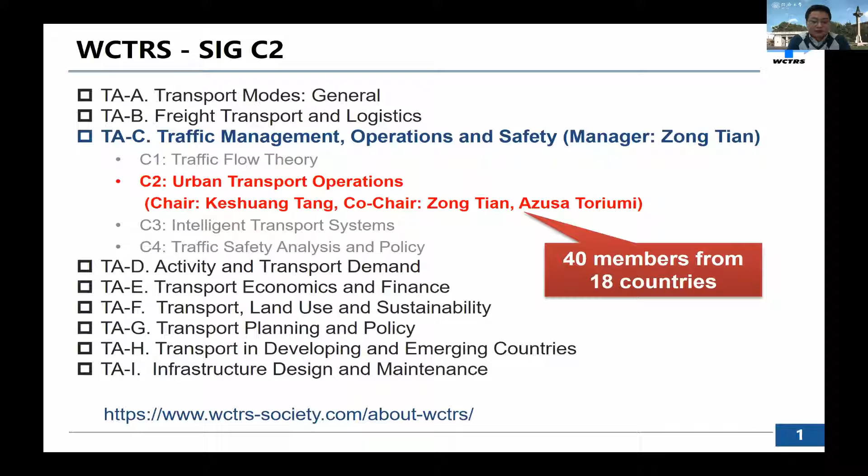Since some participants may not be aware of SIG-C2, I want to briefly introduce our SIG. SIG-C2 is one of the special interest groups under topic area C of WCTRS. The focus of this SIG is urban transport operations. Currently, I'm chairing this SIG along with Professor Zong Tian from University of Nevada at Reno, who is also the manager of topic area C, and Dr. Azusa Toriumi from University of Tokyo, who will be moderating today's workshop later. So far, SIG-C2 has 40 members from 18 countries. For more details about WCTRS and our SIG, you are welcome to visit the website below.

Before the start of the workshop, I would like to briefly explain the background and objective of this workshop. In 2017, WCTRS and Elsevier decided to publish a co-branded book series. In this context, SIG-C2 planned 3 books on global practices on road traffic signal control. So far, the first book has been published already and is now online, available to purchase at the Elsevier website.

The second book will focus on arterial coordination and actuated control. An author team led by Professor Zong Tian is working on it, and they just submitted the book proposal to Elsevier. The third book will be about actuated and adaptive control in the context of emerging technologies. This book is still in the planning stage, and you are welcome to contact me if you are willing to contribute to it.

To better prepare for the second book on arterial coordination signal control, we planned this online workshop series. The primary objective is to invite different professionals from academia and industry to share state-of-the-art practices in their countries, so that we can discuss the differences among these selected countries. Then we can have a global picture about arterial coordination signal control. This is the general purpose of this workshop series.

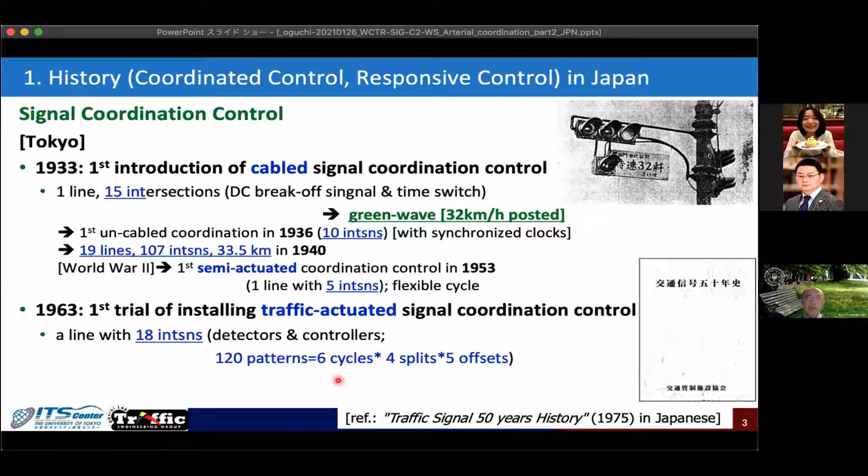This was ruled by the main computer. The idea was giving a set of parameters for signal cycles, splits, and offsets, combining them into 120 patterns, and trying to select the best patterns.

Then, after three years of experience, in 1966 came the first trial of area-wide signal coordination, at the Ginza area - the commercial heart of Tokyo - with 35 intersections applied for this kind of trial, not just one arterial but a network-wide application.

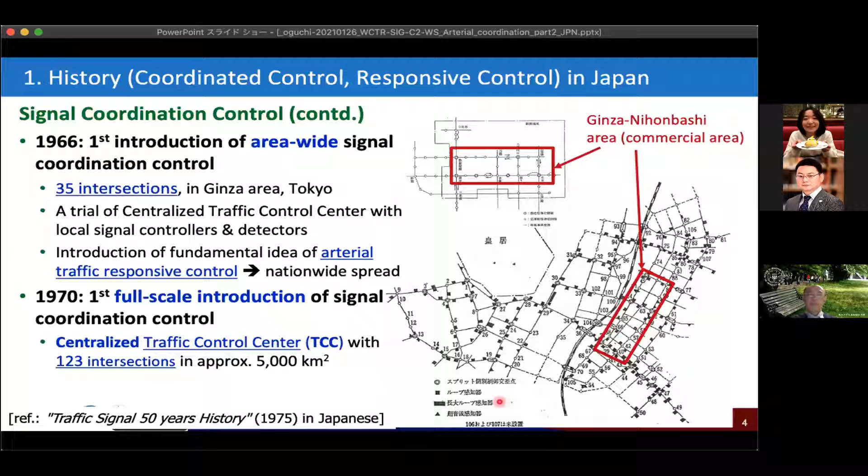This introduced a very fundamental idea to the system. Rather full-scale application started in 1970. This is the original form of the Japanese centralized traffic control system, where the Ginza area was included in a widened area application. This is the start of Japanese history in this field, up to today.

This explains the technical manual background for such practices. The first manual on signal control was published in 1969, and a design manual for intersection geometric design also started, published in parallel under different timelines.

In 1983, the first version of the so-called traffic signal control manual was published, already including a rather detailed description related to coordination. In 1994, we had a revised version, including an established idea of pattern selection for coordination.

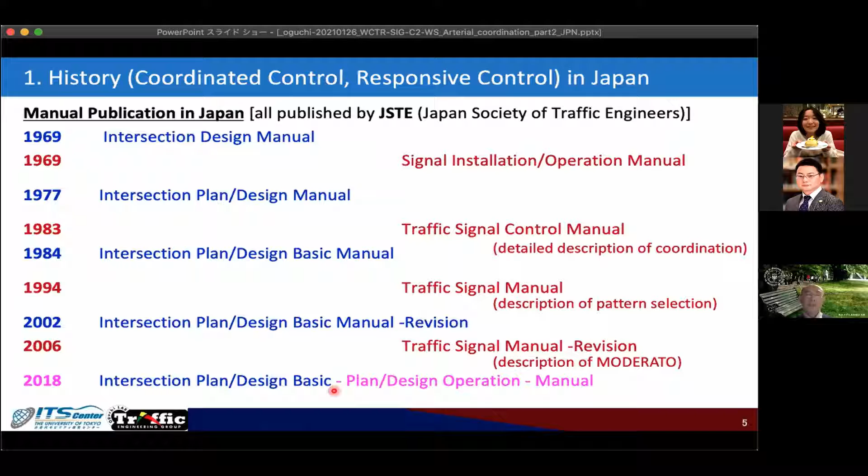In 2006, a revised version included not just parameter selection but also real-time calculation methodology. Very recently, we had a unified, comprehensive basic manual on intersection plan design and operations.

I also want to introduce the Japanese situation at this moment. This number was also introduced in the first published book by WCTRS, as Keshuang mentioned. We had centralized traffic control centers - basically every prefecture in Japan, of which we have 47, had a head center, with some control centers or subsets of centers in large cities.

The total number comes to 168. As I mentioned, the National Police Agency has responsibility for this, and the main machines and systems for any of these centers are provided by five Japanese industries.

Now about the number of signals applying such coordination: more than 70,000 signal intersections are connected to such traffic control centers and have a coordination function. On the other hand, around 26,000 have coordination functions but are unconnected, therefore working independently with their own set coordinations. Also 900 push buttons are connected to the coordinated system.

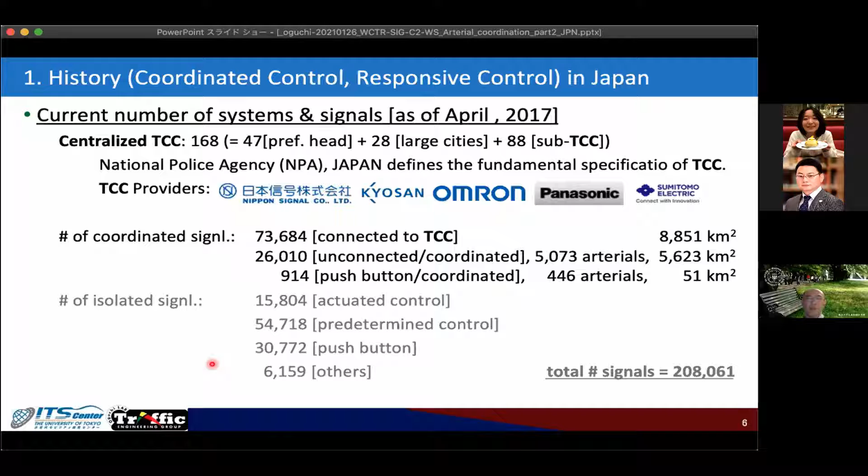On the other hand, we have a rather large number of isolated signals. One of our major topics is trying to connect those isolated signals using 5G connection technology.

For coordination, we had a very general simplified idea using a centralized control system. To consider the area-wide road network, we separate it into several subnetworks, and sometimes a group of subnetworks shares the same cycle length, so we try to connect the elements of the subnetwork and form a group of subnetworks.

This may not be such a big subnet, but looking at this area, this is a rather large subnetwork having a common cycle length of 110. So forming a group of subnets with a common cycle length is one idea, and then we determine the signal coordination for those intersections.

When you look at intersections having one link connected to a different subnet, we don't consider anything for the coordination between those two signals - that's the practice in Japan.

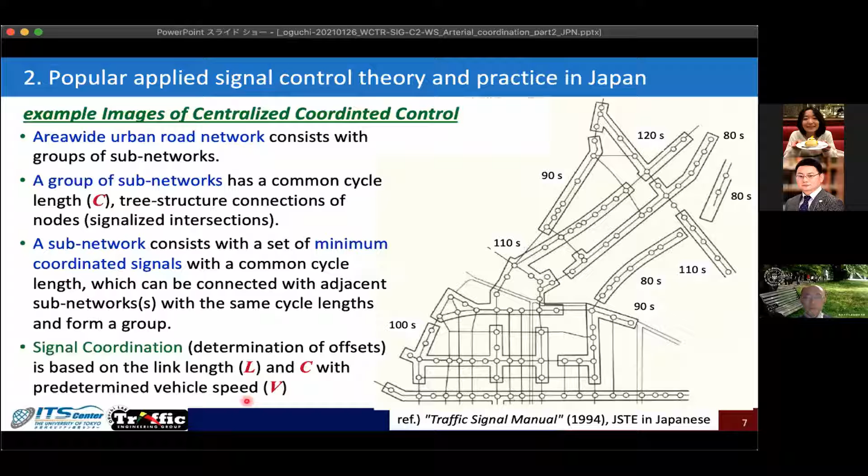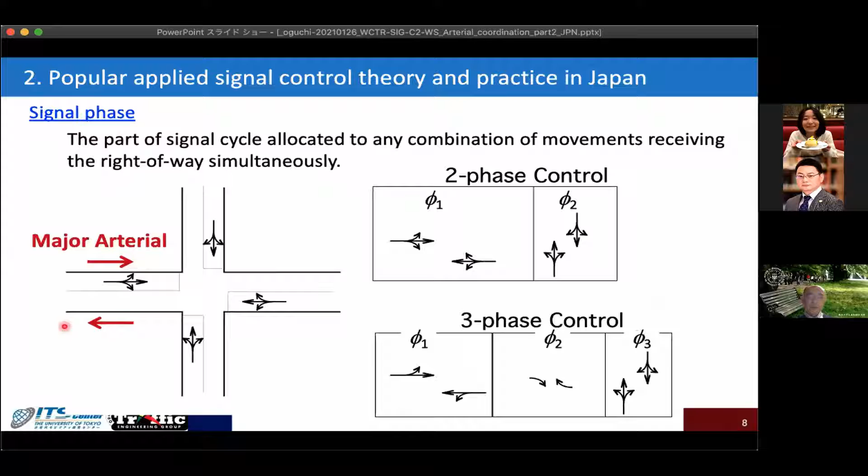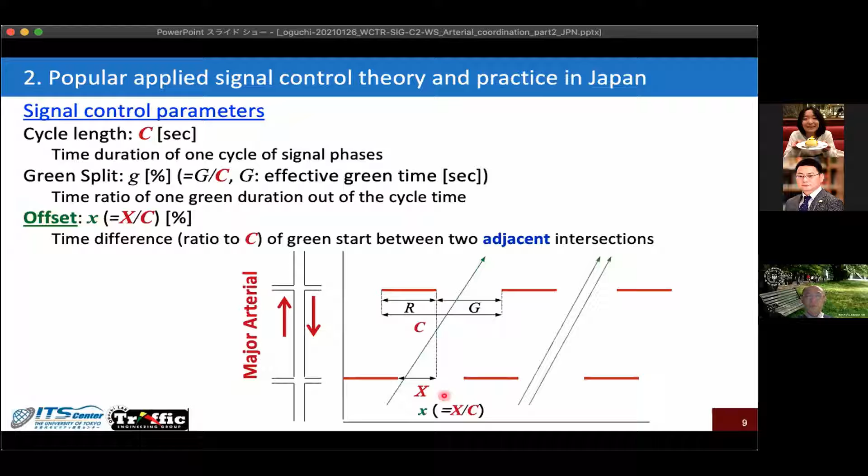Our Japanese application is very simple in considering coordination: we consider one arterial having a simultaneous start of green time for both directions, even with different phasing systems, focusing on the one arterial and trying to set the cycle length with an appropriate green split. From a coordination point of view, we try to set offset values, which could be expressed as a percentage of the cycle length in general.

For determination of the cycle length in Japan, one typical feature of the Japanese signal control system is trying to adjust cycle length very frequently, with 1 second resolution, as I showed, 101 second cycle length or something like that. From the coordination point of view, the cycle length is determined at the critical intersection, meaning the very busy intersection which should accommodate traffic demand at the highest capacity level. With such high demand, we should provide larger cycle lengths, and other intersections in the same subnet group should apply the same cycle length as a common cycle.

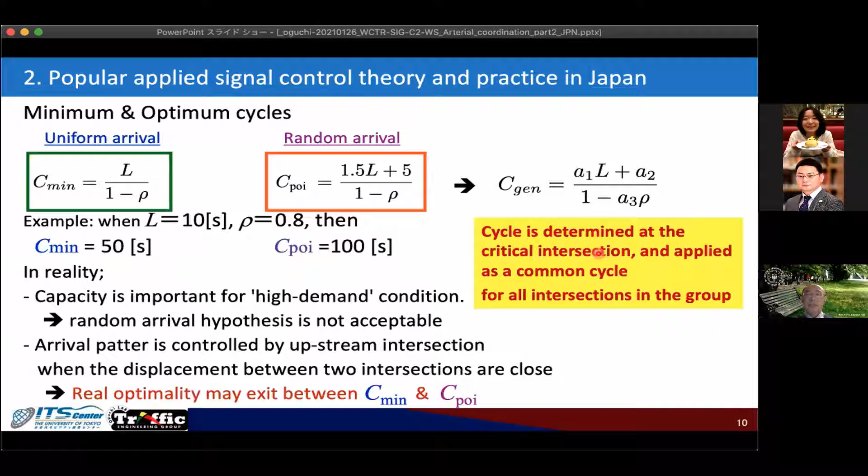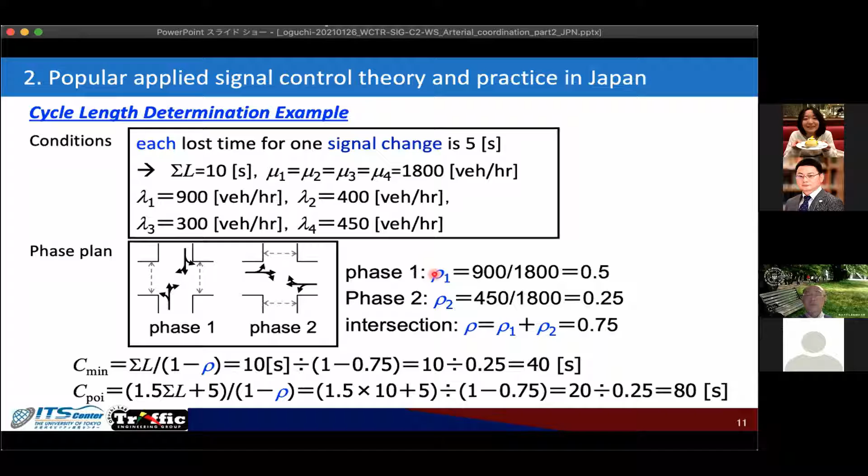This is just brought from my lecture note. Basically our Japanese practice is based on the concept of the flow ratio, demand flow rate to the saturation flow rate, so-called flow ratio, and applying that value to select the green split. This is the basic idea of setting the green split, and even for coordinated signals we apply the same idea.

This slide explains the classification of different aspects. First, the classification aspect is spatial: isolated, arterial, or network. For arterial or network coordination, determining the offset value is one important topic. On the other hand, for control classification, there is pre-timed control or responsive control - those are the two major differences.

As I mentioned, the intersection which is connected to the traffic control center applies a kind of responsive control. We have 168 traffic control centers, but the majority is still kind of simplified macroscopic traffic responsive control, meaning predetermined patterns of parameters are selected with some detector information, with rather fewer applications of real-time calculation of parameters.

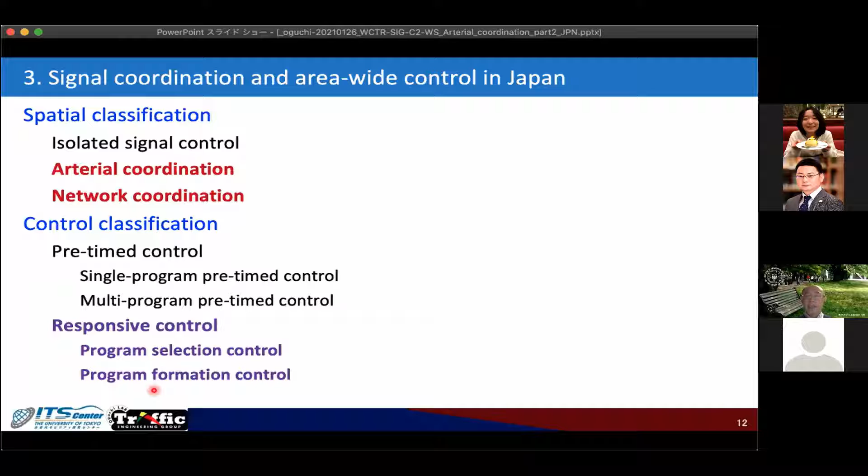Multi-program pretimed means for different days of the week or special conditions we have predetermined cycle lengths, green splits, and offset values. Such predetermined coordination control is applied at around 26,000 intersections, plus less than 1,000 push-button pedestrian crossings.

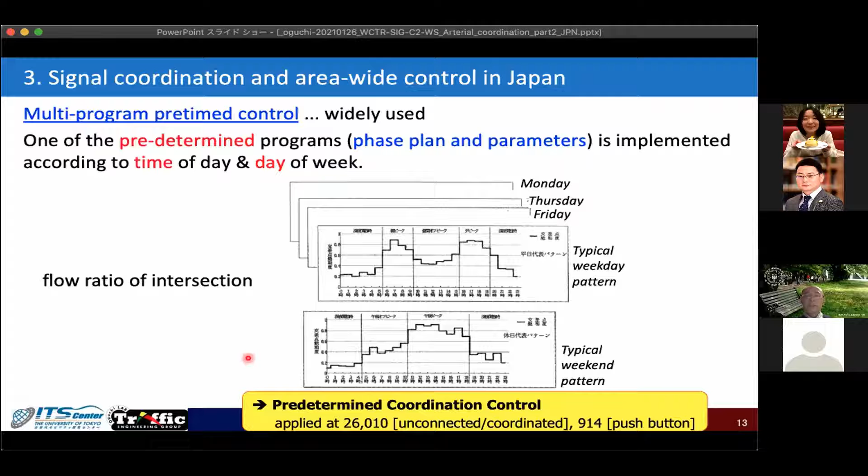For responsive control, the control parameters - cycle length, green split, and offsets - are selected or calculated in real-time using detector information. Responsive control is rather popular for microscopic response, meaning each intersection has its own responsive control function, for example detecting right turn vehicles and then extending the right turn phase or giving right of way to right turners.

On the other hand, from the coordination point of view, some macroscopic responsive control ideas are also applied in Japan - selection or generation of cycle, split, and offsets. Also for oversaturation situations, we have algorithms to select or generate those parameters.

To tell the history of Japan, the reason why we started introducing the traffic control center in the heart of Tokyo, Ginza, was to try to alleviate traffic congestion. The development of the control system in Japan was basically pushed by such serious congestion issues. At this moment, more than 70,000 intersections are controlled with this macroscopic responsive control scheme.

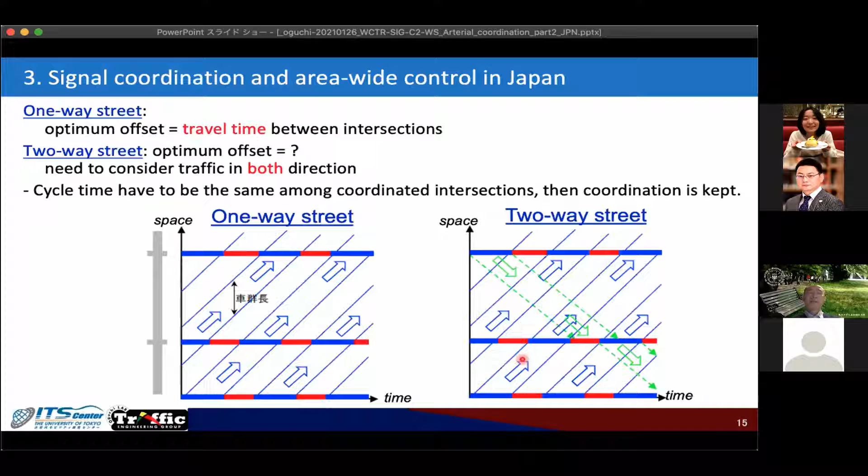The simple idea is considering that the return travel time should be a multiple of the cycle time. So set some cycle time, then the best coordination distance is determined by this, with a given travel speed, since travel time is length divided by speed. In our practice, we always consider the special cases of very well coordinated lengths or worst coordination conditions, where changing offset values achieves no delay reduction or no stopping conditions.

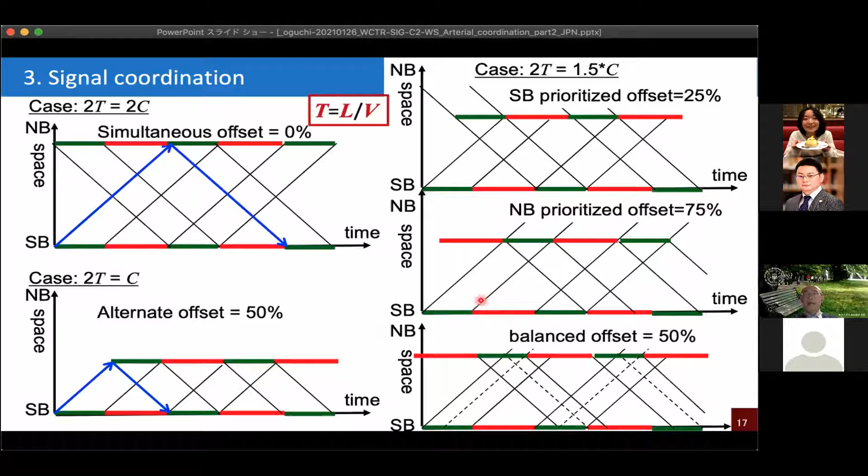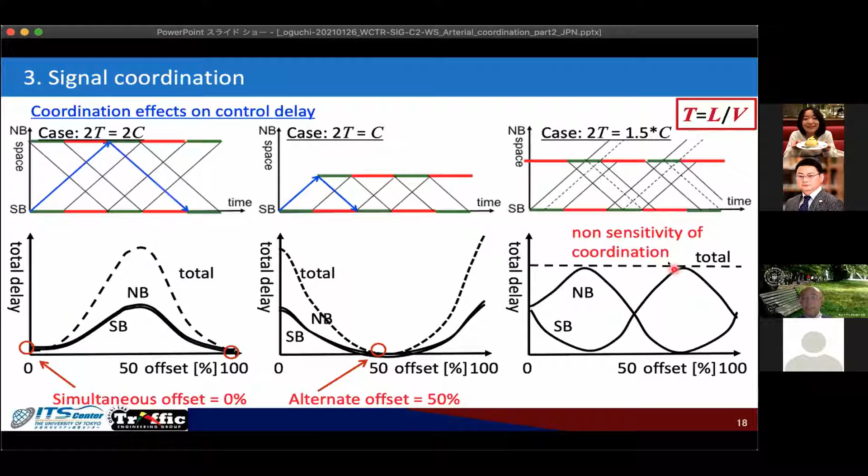To discuss the control delay, for the best conditions we can achieve no-stop delay for both directions, northbound and southbound. On the other hand, for some intermediate situation of the length, these situations have no effect on the total delay or average delay for both directions.

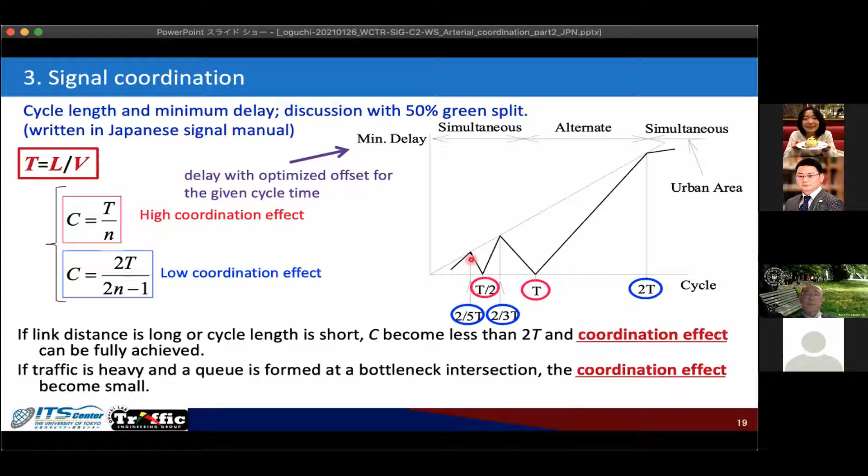And also, we had knowledge about the cycle length optimization conditions and cycle length settings for coordinated signals. Basically, if the cycle length becomes longer, the minimum achievable delay, which means well-coordinated offset values, we should still accept some level of delay, then it will monotonously increase.

This achievement was done by Professor Koshi. The publication was in 1989 in English, but he already proposed this concept in 1975 in Japanese. The Japanese manual applied his concept, so Japanese practice also follows this kind of idea.

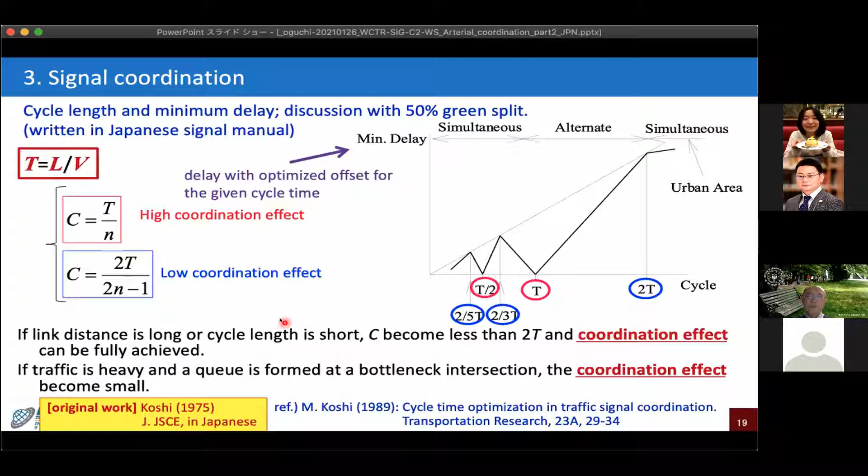This also shows the sensitivity of the coordination settings. At the best situations of this link length, we can achieve the highest coordination effect, which means when you set the most appropriate offset value, you can achieve the minimized delay. On the other hand, at this link length situation, maybe you can have any arbitrary offset values to achieve the same delay levels.

But this knowledge is very limited because it's only introduced for 50% green split for two intersections connected to one link. So this is a very ideal situation consideration only - only one isolated link with two intersections connected. Then we can apply this kind of idea. But in reality, maybe those two green splits should not be the same.

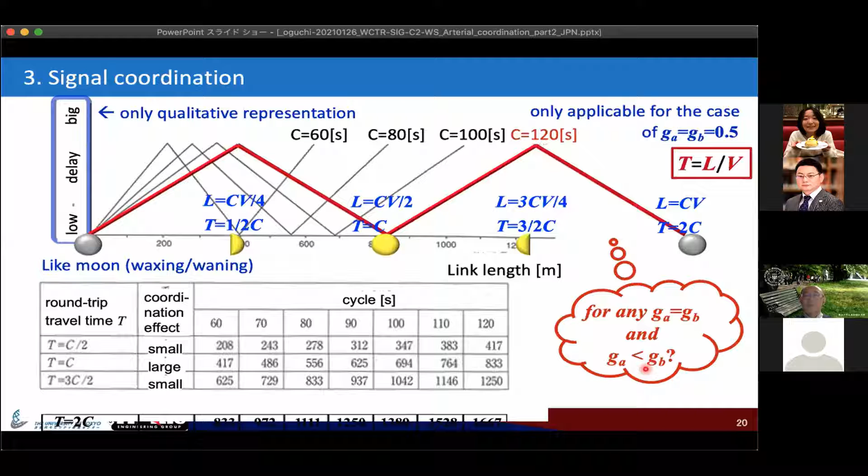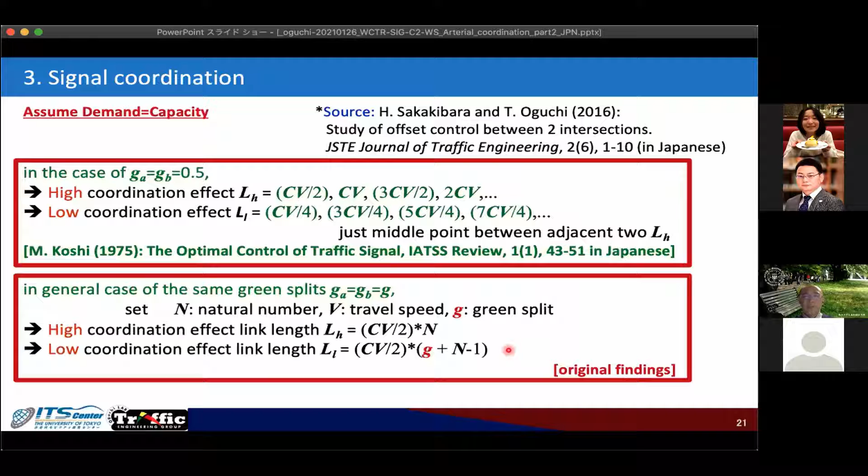So what will happen? Several years ago, this was a joint study, and we analyzed the characteristics of signal coordinations. But I will skip this topic, and also the generalized achievement we got very recently.

This is also something interesting - with some range of the cycle lengths, we can achieve the minimum or zero delays, and this is the characteristic when we have different green split values.

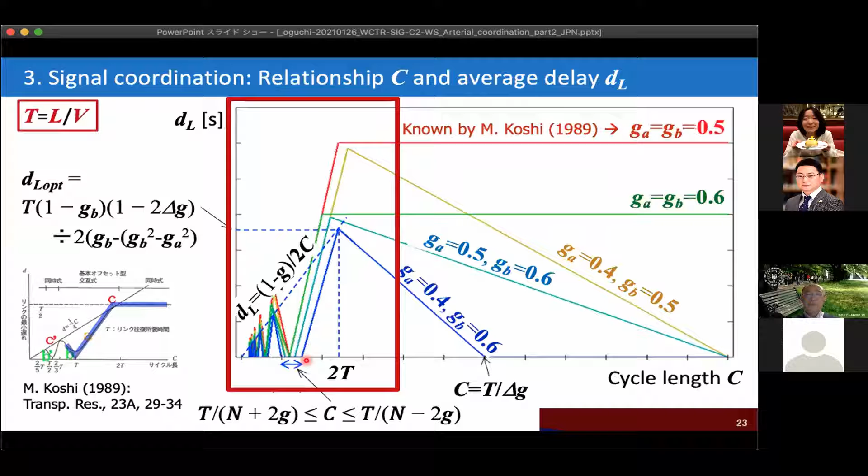Okay, then come back to the practice in Japan. I have only six minutes right now. So what is the offset pattern selection method applied for the Japanese traffic control center?

This is an example of selecting tables. With detector information - one direction inbound flow ratio and the outbound flow ratio - applying those values, if the value is located here, some pattern of the so-called equity 2 should be applied. But if there's a rather low outbound flow ratio while the inbound flow demand level is high, then semi-prioritize to the inbound, or rather priority to inbound. This kind of idea is introduced, then the offset values are put in place.

In addition, these offset selections are done, for example, every 15 minutes or every 5 minutes. And if the offset values change from the last 15 minutes to the next 15 minutes, then we should change the offset value.

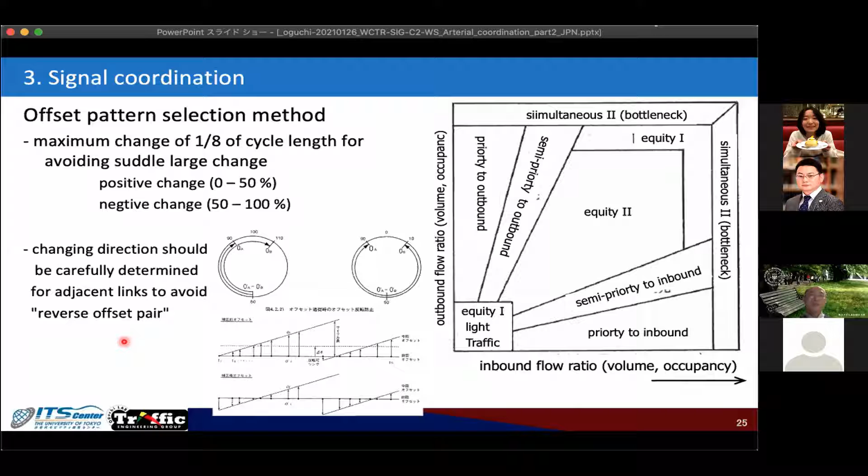We should also be careful that the changing direction - the offset value increase or decrease - should be carefully selected, because two adjacent intersections having different directions of movement can come to a reverse offset condition, which results in both sides facing a red signal and rather serious long queue lengths.

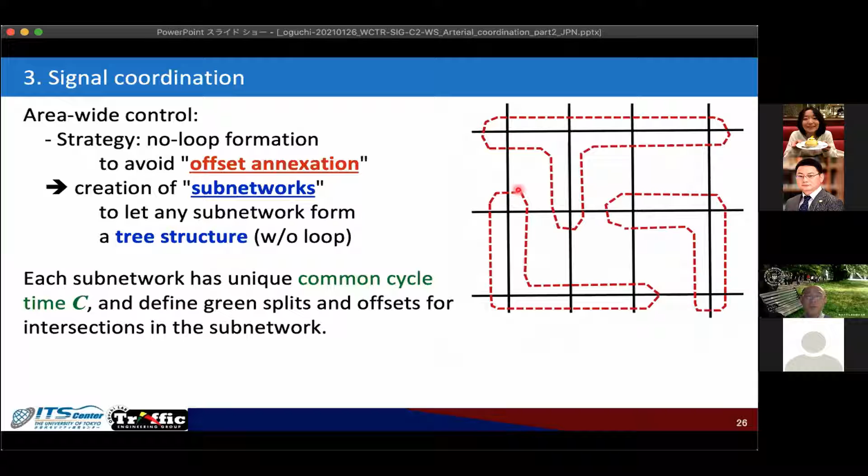As I mentioned, the forming of subnet systems is based on a tree shape structure, not having a closed loop. Having a closed loop means we cannot have appropriate parameters for all the links. Sometimes we should also reform such subnets, so the changing shape of those subnets is also considered every 15 minutes or so.

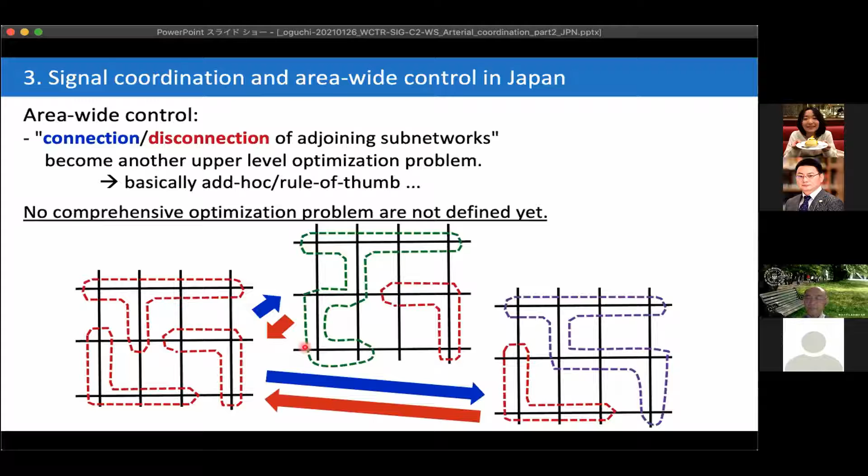The time is very limited, so I'll just explain several application cases that have been published. The first one is from 2013, when the Tokyo Metropolitan Police Department experienced this introduction.

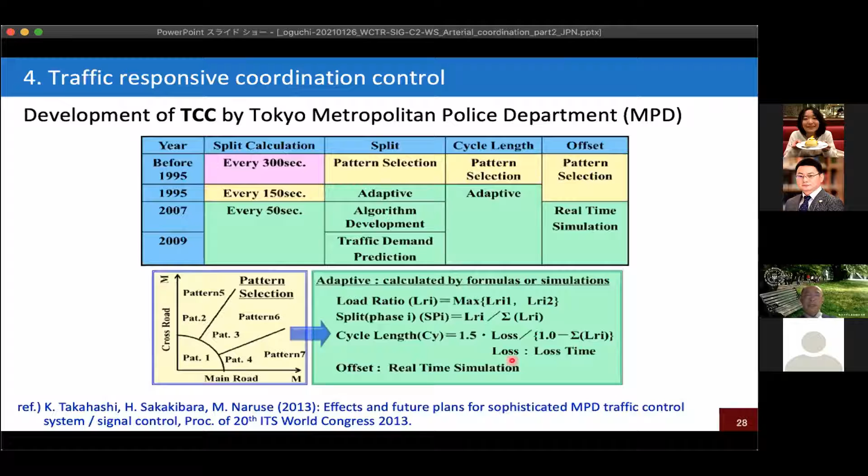From 2009 in Tokyo, the split is calculated very frequently, and the traffic demand applied is not just measurement, but a kind of prediction is also already introduced. The cycle length is calculated with a formula, and offset is also calculated using some simulations. So pattern selection is the rather old-fashioned approach, also requiring a long calculation duration, but applying a rather short and rather theoretical form.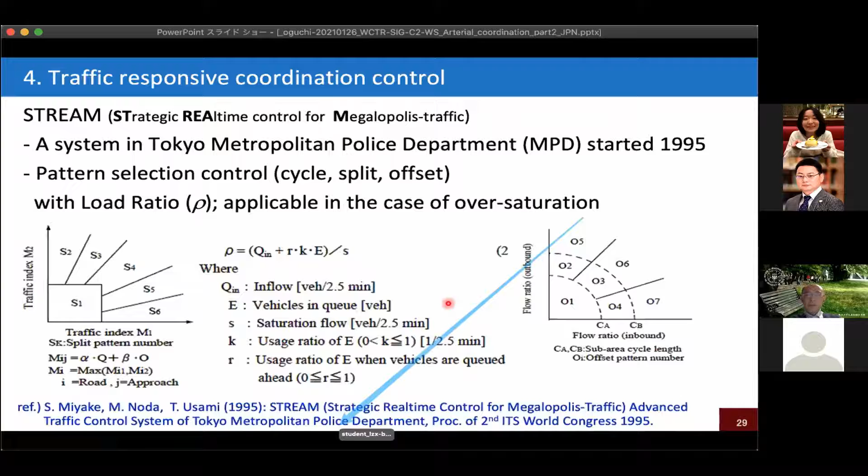Okay, this is the Tokyo Metropolitan Police Department practice, started in 1995, as I mentioned, with pattern selections using those tables. And another thing is...

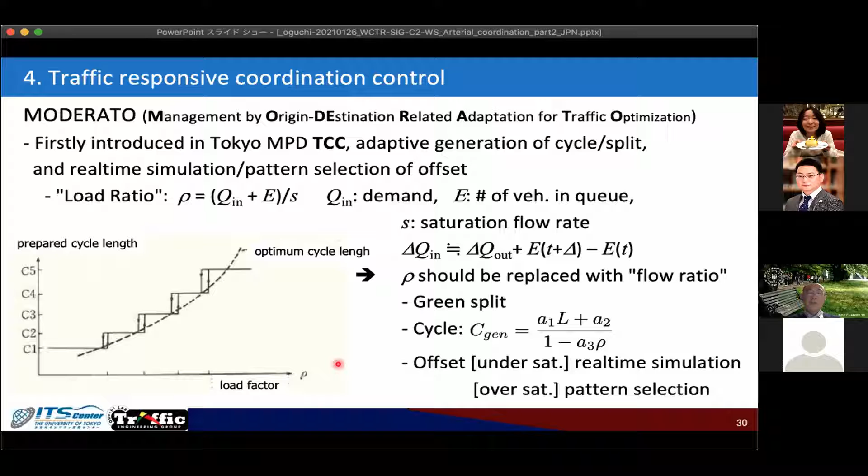The so-called MODERATO is a Japanese signal parameter generation system based on a concept similar to flow ratio, but the new idea is load ratio, which is applicable for oversaturated situations. It replaces the indicators with the flow ratio, and tries to set the green split with this, and set the cycle lengths. The offset is not all calculated by simulation. Some pattern-based selection was applied for oversaturated situations in the beginning, but at this moment they apply other conditions too, starting in 1999.

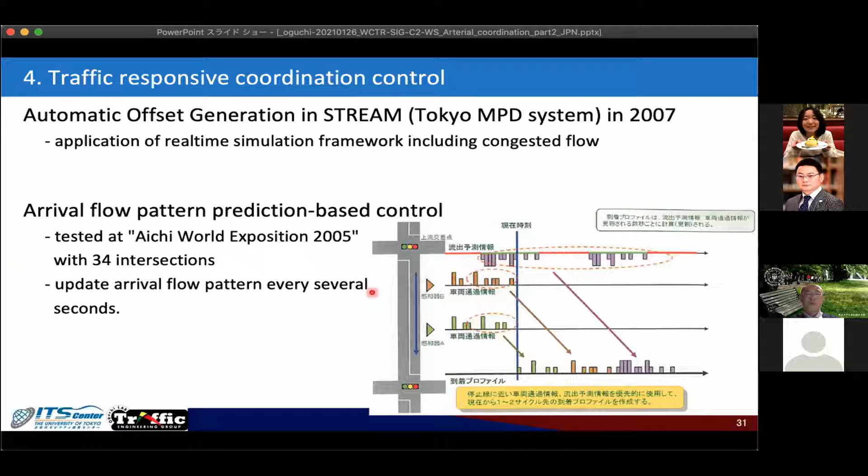And these days, some progression of the arrivals is also considered and already applied. Okay, then that's all for my presentation today.

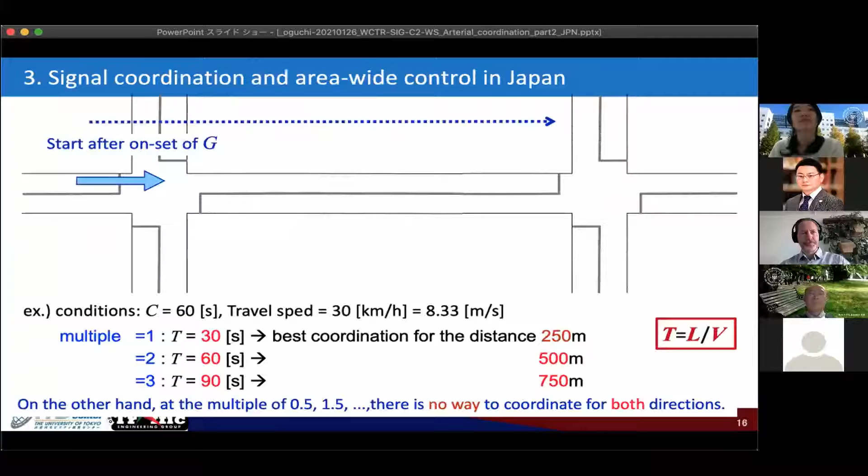Thank you, I have a short question. Yes, please. You showed us in one of your early slides that you replaced the ordinary loop detectors with probe data, if I remember correctly. So is that practice or still in research? Yes, this one, the replacement with probe.

You are saying that you are going to use the probe data to replace roadside detectors? Yes. Maybe today I didn't have time to talk about that, but as you may observe, a very large number of intersections are connected to the traffic control center, and one traffic control center, for example in Tokyo, is connected to a huge number of intersections. And that control is based on detection information from traffic detectors. Therefore, they also have to maintain a very large number of traffic detectors. But these days, because of the limitation of human resources and monetary budget, they try to reduce the number of detector systems they maintain. Therefore, they are very interested in introducing probe information.

These past few years they had a kind of national project checking the usability of probe information. But it's still an ongoing project. There are several projects, and at this moment it's not yet in practice. That's the reality.

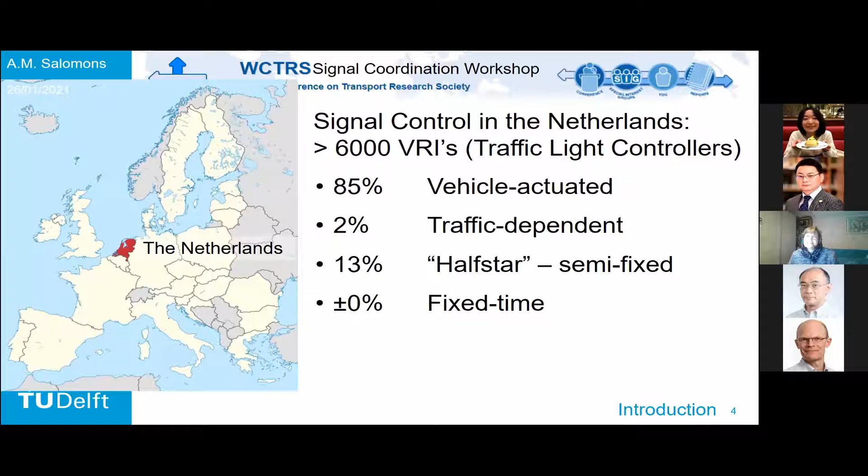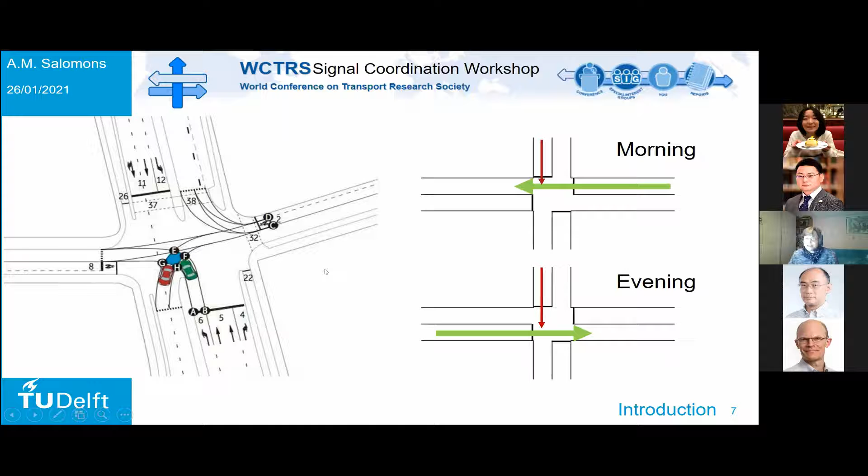So that's a different program. Now the policies on coordination: intersection control should be credible and understandable for all people using it. So people on the coordinated direction, they expect that the signal will not turn red when moving to the next intersection, that they don't have to stop for every intersection.

But people from the crossing directions, they do not want to wait for nothing, because we have a lot of intersections that are vehicle controlled, so controlled on the appearance of vehicles at the intersection. People are used to: I'm here, I do not see any traffic yet, I'm going to cross. So when you have coordination with a lot of waiting time for crossing traffic, people tend to run red.

So intersection control should be credible and understandable, avoiding, when possible, unnecessary stops and waiting, both for the crossing directions and for the coordinated direction. We have to balance between those two.

We should avoid spillback - this is a very important reason to apply coordination. So if you have an arterial with a lot of traffic, you might have spillback if you have unnecessary stops. The downstream intersection might experience...

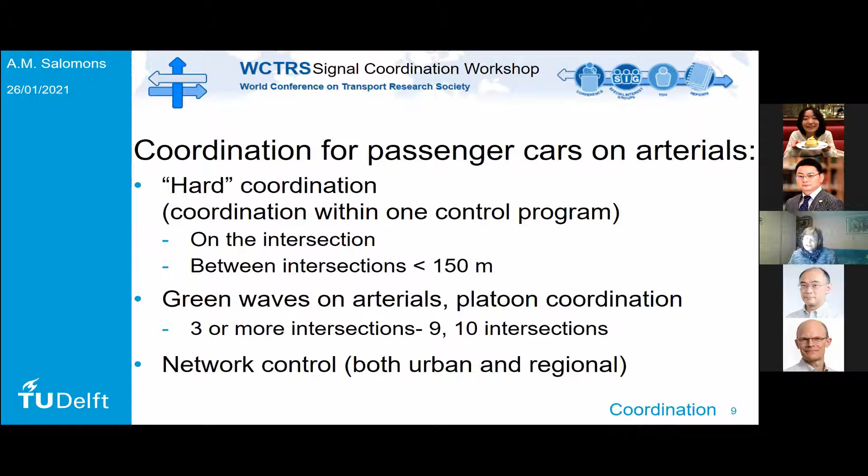You can have greenwaves on arterials with platoon coordination for three or more, or you can have network control when you have intersections not on one arterial. And the major part of this talk is now about greenwaves on arterials.

So we have halfstarre regelingen, as it's called in Dutch - this is semi-fixed time control. You have a fixed cycle time with the offset and the control between the coordinated intersections. So you have coordination on the main directions, but flexible green.

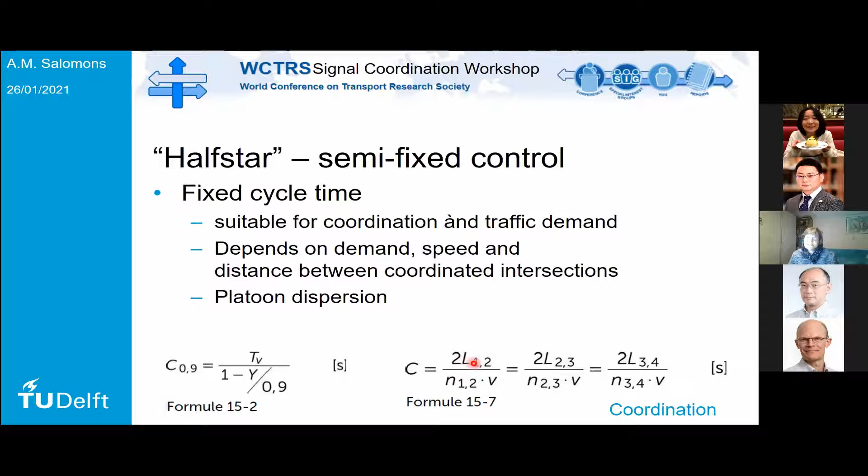So it depends on the demand here. 90% of the time the queue should be dispersed, and this is the distance between intersections if you have three intersections, and this is the speed.

So it's half star, semi-fixed. We have green split based on the detector info, so you have to optimize the green wave further or limit the waiting time for crossing directions. How does this do? The green time coordination is limited, and that is not a problem because you have compact platoons, so less dispersion.

And how does this work? We have 3 intersections, and these are the phases. So first in this direction, and this is the coordinated direction. So in this direction and this direction.

We have also detectors, so we can detect how well the coordination is. So if there's platoon dispersion, the platoon is close together here, but not in this direction. Suppose you have the platoon dispersion, you need more green time for this direction. And suppose in this particular situation, you measure by the detectors, there's no traffic on direction 9.

Then you can say, well, first we have these phases. So first the east-west, then the turning, and then the north-south. For 9, there is no traffic, so we can say we need these phases, the left turn instead of this left turn.

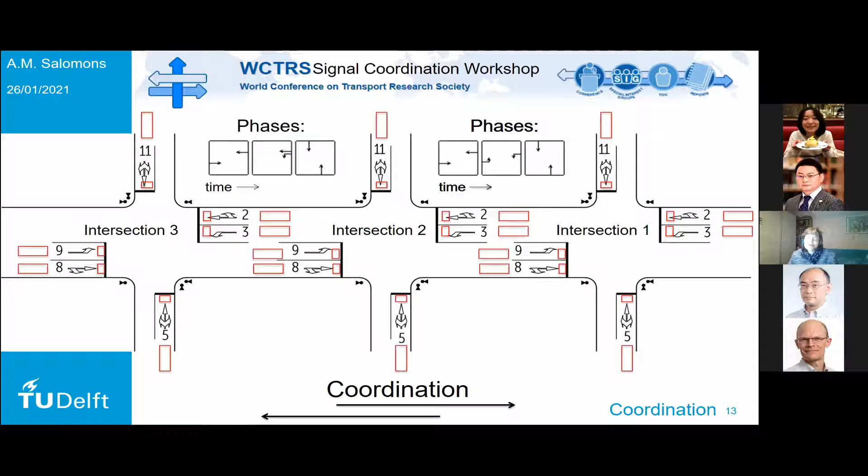And we can prolong the green time of 2. And then we have optimum coordination and no problem for the crossing direction at intersection 3.

As I said before, the speed is of importance, and you have to inform the people that there is a certain speed they can have the green wave. So we have ODYSA. When you see a name abbreviation with a star, this is the company, and this is the method.

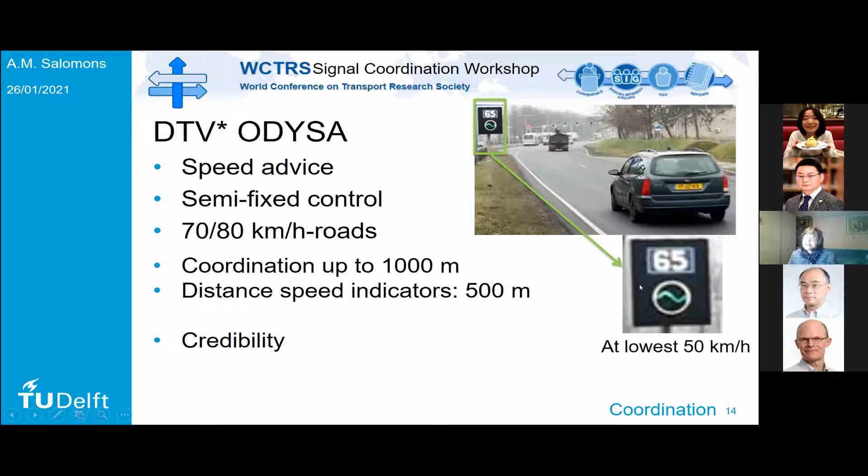So the company consultancy DTV has ODYSA, and this gives speed advice for semi-fixed time control on 70-80 km/h roads, not for 30 kilometers. You can have coordination up to 1 kilometer, with signal givers every 500 meters, and you should give a credible control. Therefore, it's only used for semi-fixed time control.

And this particular location, what did I do? This is for Bergen op Zoom. It has 9 intersections, and for the credibility, this is only used for semi-fixed time control.

I will show more methods, but they are not used with this type of signal giving, because you have to be certain you have the green wave. If people experience I'm keeping this speed of 65 km/h as indicated, and I do not have a green wave, I'm very frustrated and I won't keep the 65 km/h.

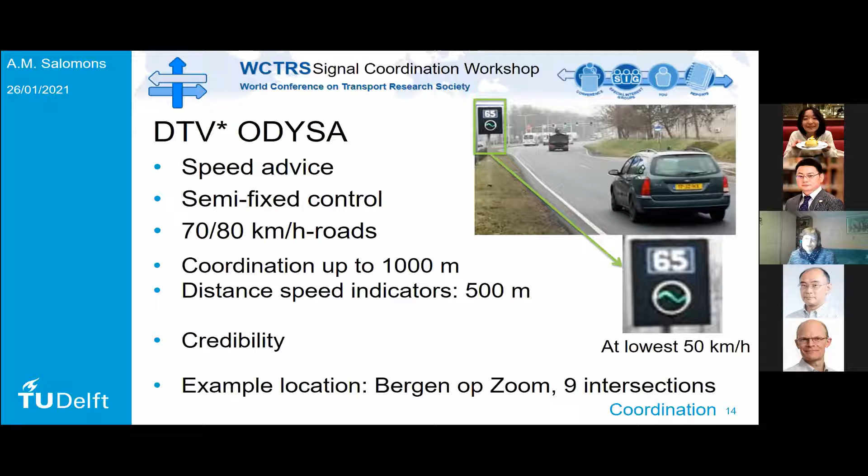On the other hand, you might have people that say, I've never experienced a green wave, and complain at the papers, writing a letter: dear editor, I never experienced a green wave over there. Then you have next paper people saying, oh, but you're speeding, because if you stick to this certain speed, you will most certainly have a green wave. So people get used to correct information.

There once was Utopia Spot in Italy, and we tried that in the Netherlands as well. It's a combination of coordination and bus prioritization. We said, well, we haven't bus prioritization ourselves, so let's try it out. But it was not well balanced for the Dutch situation, so we left this method, because the bus priority appeared to be too disruptive if the bus came from the non-coordinated direction.

In the Netherlands, we love conditional priority. So if a bus is late or on time, it will have priority. If it's early, it won't have priority. And we won't prioritize it every cycle. So we do not use Utopia Spot anymore.

What do we use? The consultancy of Vialis uses TopTrack Flex. TopTrack has a central server, and it's based on TRANSYT Online, a very well-known method from Great Britain. You can't find everything about it online, but one thing I will explain: it uses performance indices.

So you can say beforehand, I want to determine how many stops, and how important I think there should not be stops or delays on both the coordinated or the side direction. Then you can determine beforehand and say, I will have these objectives, calculated beforehand, and you can check if these stops and delays are important, determining whether it is suitable. So not only simulating beforehand is important, but you can also calculate what will happen in these situations.

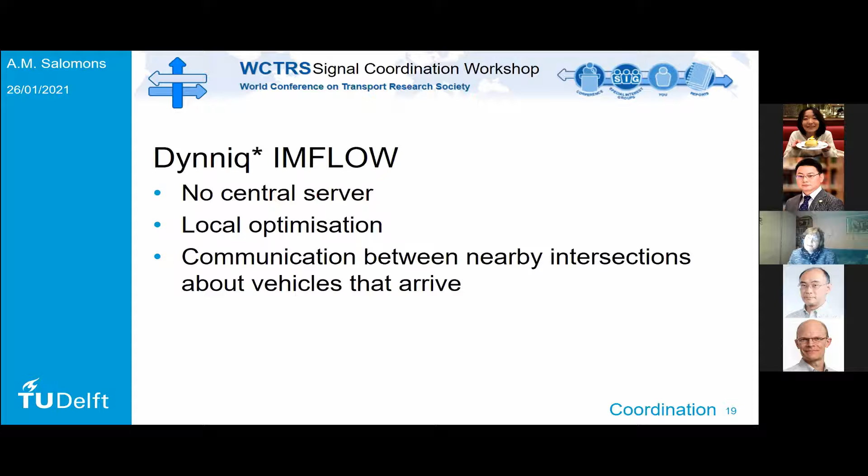Yet another consultancy, Dynniq, has the ImFlow Method. This is quite different from Vialis because it has no central server, and everything is done locally with local optimization by communicating with nearby intersections, and it's planning per minute. The optimization is based on weighing factors and priority, and is bounded by maximum waiting times.

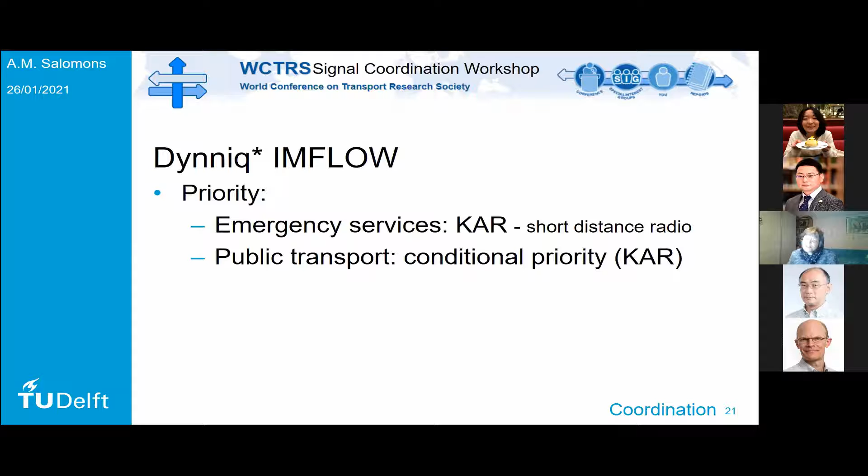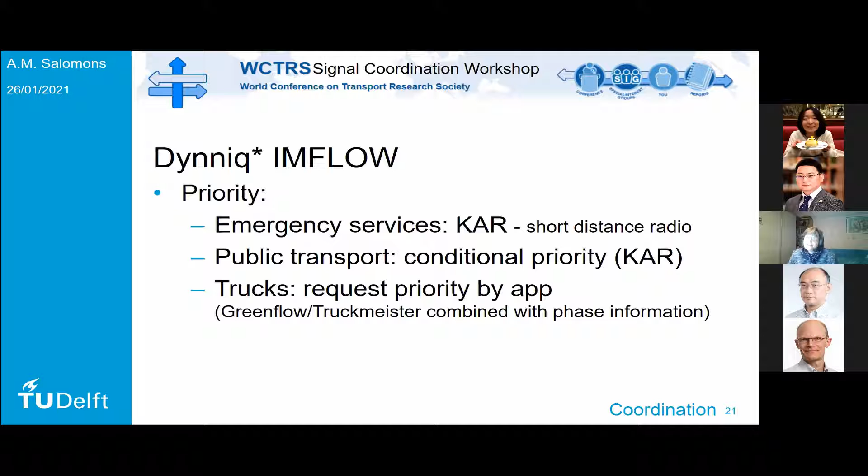It also has priority: an emergency service can say, hey, I'm an emergency, and with a short distance radio, we communicate. Also public transport, but this is conditional when they are on time or late. Trucks can also request priority by an app, the Greenflow Truckmeister app, combined with phase information, so the truck gets time to red, time to green. This gives soft green waves.

For large distances, it will lead to variable cycle times, so it's hard to make a green wave, but again, with a higher weight on platoons, you can realize semi-green waves. But it's less good at making green waves than TopTrack.

So here in Delft, where I live, there's a new type of intersection control, ImFlow. It uses glass fiber connection, and you can see for the intersections which vehicles are coming, and you can predict the intersection demand and try to make a green wave.

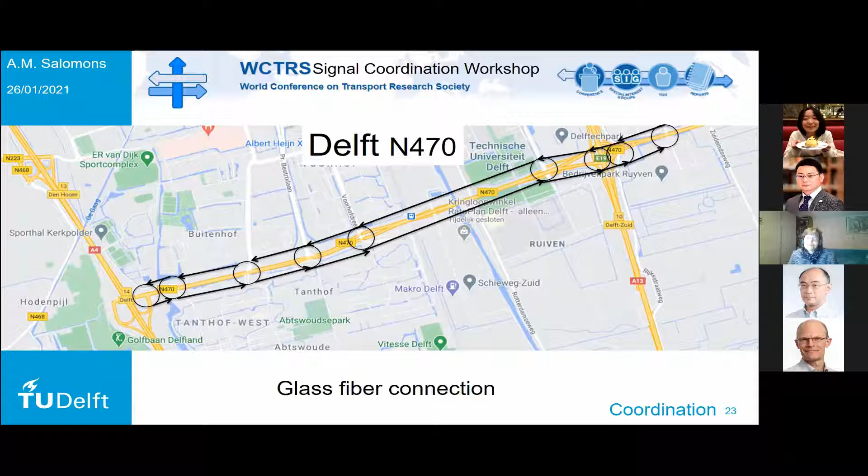This is very new, just installed last year, and they are also very happy with it.

So we also have intelligent traffic control. This is new in the Netherlands, it's being installed as we speak. 700 intersections at the start of January with intelligent traffic control, in Dutch called IVRI. So ITLC, the Intelligent Traffic Light Controller. It can use common intersections, and for more advanced vehicles, they can communicate with a roadside facility.

But the new fact is that everything is now stored in the cloud, whether it comes from detectors or from more advanced vehicles. Everything is stored in the cloud, and we have a priority broker. It says, well, I see a platoon coming now, I will give priority to this platoon. So you can also control in the cloud.

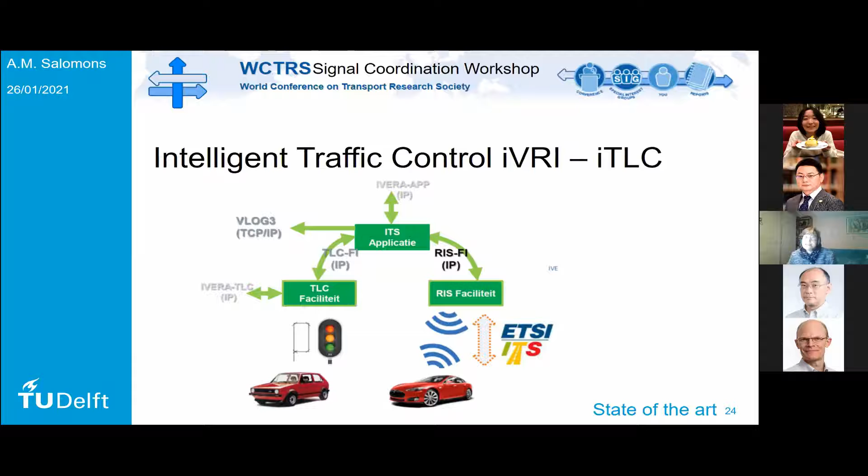Before, with normal VRI's, normal traffic light controllers, there was a problem: if you have controllers from different manufacturers, they can't communicate. Nowadays, with everything in the cloud, you can communicate. So if you have intersections from various manufacturers, it's easier to communicate, but it also makes network control, and coordination, easier. So we're very happy to have these IVRI's.

And the idea from intelligent traffic control is to prioritize, inform, and optimize. So we have more effective data communication. We have, although it's a small percentage, vehicle to roadside infrastructure communication. It's now 5 to 7% of vehicles that have this possibility. And we can give time to red and time to green, or speed advice.

Well, we can have in-car information. You see over here, in-car, 70 kilometers per hour, or you can say, well, this is the time green that remains.

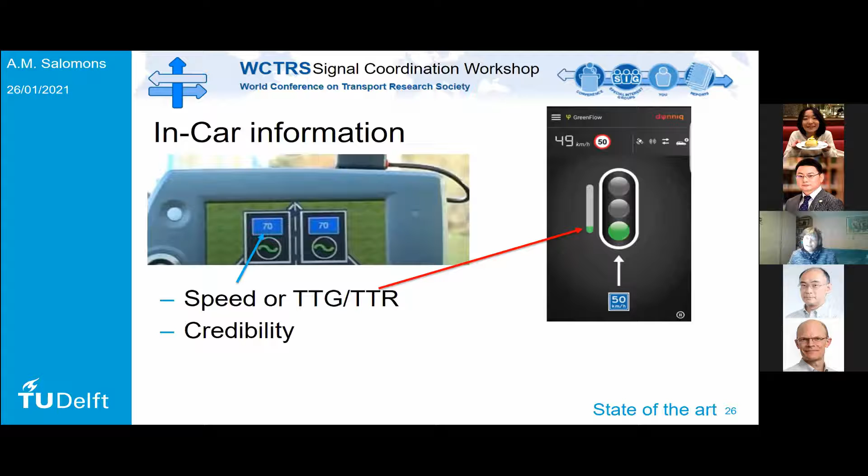When you give in-car information, credibility is of importance. When you give information, you should give the same information to all cars, because you can't have one car keep 70 kilometers per hour while the car in front gets the 50 kilometers per hour information, and it brakes, and you have a credibility issue. So you should give the same information to all cars.

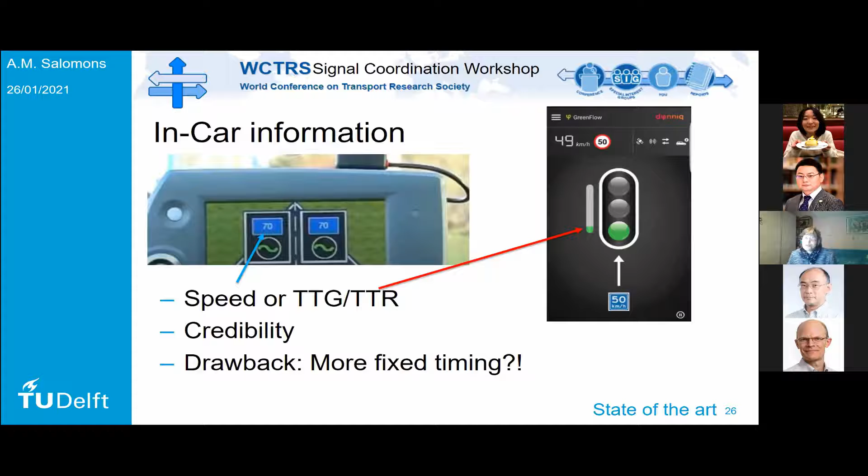So it's basically the same as giving information at the roadside, because you have to give all the same information, and that is also the drawback: you have more fixed time. If you have a fixed-time green, the credibility will be very high. So we are a bit afraid in the Netherlands that car manufacturers say, hey, I want to give in-car information, and it should be 100% credible. Now we have nice detectors and flexible green times, and giving 100% credibility is not possible. So we are very afraid of moving toward more fixed-time green.

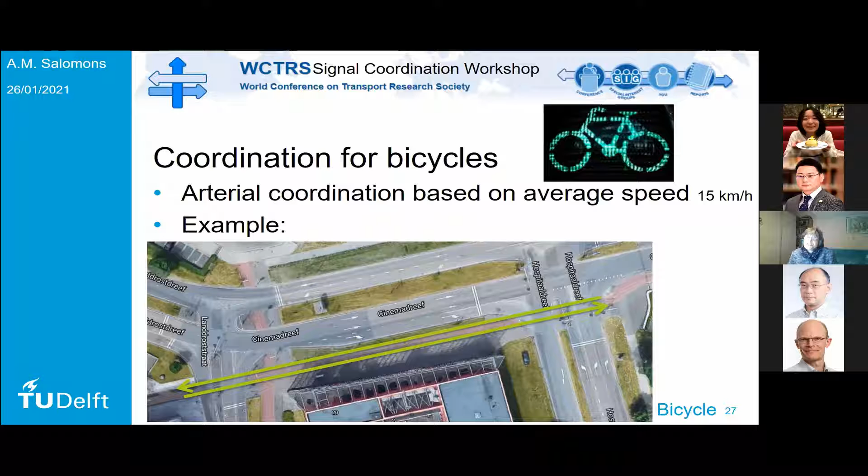But we have large speed differences for cyclists. One cyclist has a normal bicycle and is a bit slow, so 12 kilometers per hour. The other has an electric bicycle - they're also on the upswing in the Netherlands - and drives 22, 25 kilometers per hour. So there's a large difference in speed, which is why you like to give speed advice to cyclists, most certainly if you have coordination, but also for isolated intersections. Cyclists hate to stop and start again.

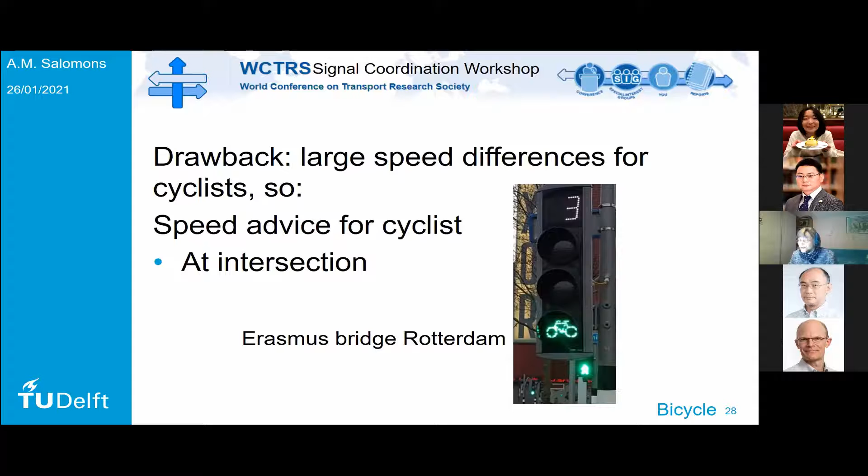So at local intersections we give speed advice. Here is the Erasmus Bridge at Rotterdam, where they give 3 seconds more green. This is at the foot of the bridge, so you have the slope of the bridge, which is a bit steep, so you have a higher speed. Then you see in the distance, 3 seconds left - what shall I do, shall I continue my high speed or apply my brake? So you can have speed advice for the cyclist, and you don't have to determine it yourself.

There are two apps, with more coming up - I'm explaining two, Ring Ring and Schwung. Ring Ring informs the cyclist 100 meters upstream: I've seen you, then you hear one ring from your mobile phone in your pocket. Before the light turns green, it will inform you that the green time will be shown soon. So if you want to accelerate, do it now, because in a few seconds it will turn green.

Schwung learns from the cyclist's behavior. If you have coordination on a certain direction, but Schwung learns you're not going to make use of this coordination because you're going to leave the arterial, then the green time will not start earlier. So you know exactly if there are cyclists that want to use the coordinated green, and if there are no cyclists, you can determine this green split will not prioritize the cyclists. This is very important - it won't give green if not needed. This will of course enhance the credibility.

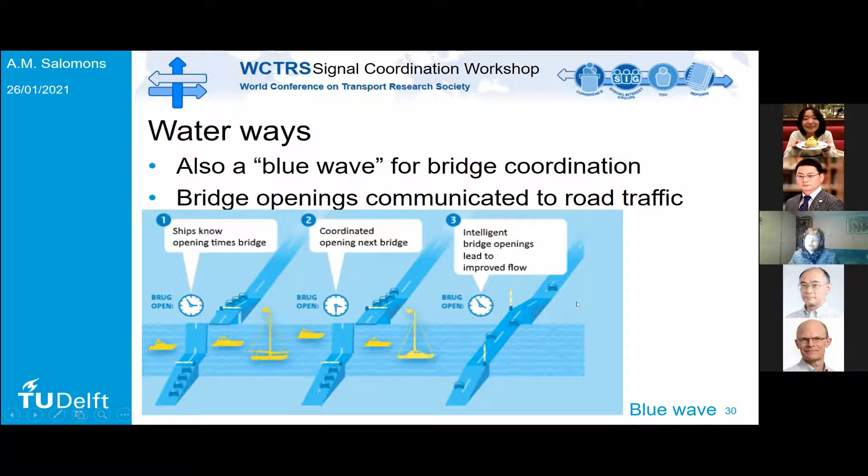This was my presentation. Are there any questions?

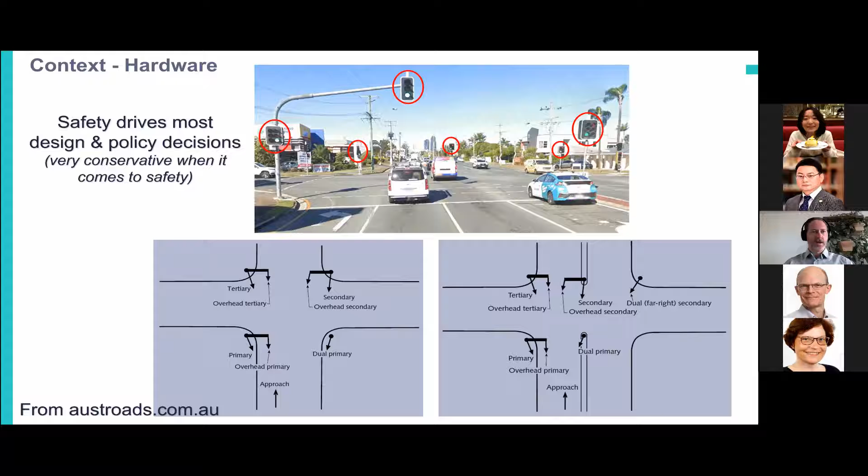In terms of coordination, the majority of our traffic signals are semi-responsive. In the SCATS land, both SCATS and Streams were developed starting in the 60s, 70s, funnily enough, around the same time. Nowhere near as early as Japan, but then again we haven't quite hit the 200,000 mark for traffic signals either. Streams was originally put in on the Gold Coast, where there was a long line of cars going to the beach along a series of roadways, and they needed traffic signals to coordinate the traffic and allow cars from the side streets and pedestrians across the road. So in 1969, they put in the first coordinated system for Streams. SCATS was on its way to development, but they say it officially started in 1975, though I think the origins were probably about 5, 6, 7 years before that.

In terms of how SCATS operates, it works with equisaturation on each approach. SCATS essentially works by looking at the degree of saturation on each approach, measuring the current flow versus the best flow on that approach, and trying to optimize so each approach has a degree of saturation of 90%. This uses the incremental split plan selection, plan 35 within SCATS land, and it works extremely well. The feedback loop at the intersection works very well.

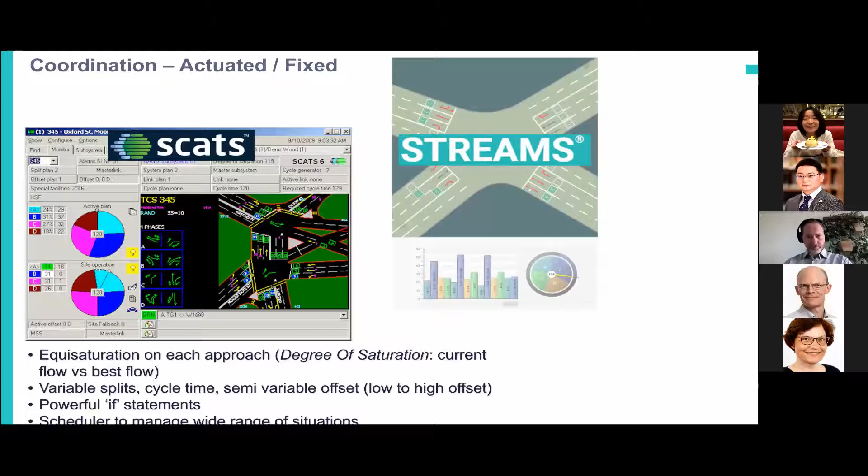On the other side, Streams uses user-created plans with the ability for unused time for each phase to be transferred around. Personally, I don't think it's probably as optimal as SCATS, but it does have its benefits in terms of the selection and creation of plans for the offset. For a particular coordinated route, we can select the optimal offsets at different cycle lengths, where an 80-second cycle length works really well, but a 90 or 100-second cycle length is poor. But then again, at 110, it's a good offset for bidirectional coordination. We have that power, so we can do time of day plan selection, which is very similar to the Japan semi-actuated, I think it was.

Apologize if I got that wrong.

We follow a typical day, and we can say that at this time of day, this plan should be running with these offsets, these splits for cycle length. We've also got dynamic plan selection, where looking at a corridor, it can look at the occupancy of the through movements along that corridor and say, we're operating at a high occupancy with a bias towards the inbound direction, and that will select the inbound high direction plan and apply that one.

So Streams also has a very powerful if statement. Because it's an ITS platform, it can bring in inputs from more than just the traffic signals - from a lot of different areas, such as Bluetooth detector readers for travel time, water level sensors if there happens to be a flooded road. A multitude of different sensors can be brought into that if statement. So not only can it do the if statements at the traffic signal level, it is aware of the wider network as well, which can be very handy at times. And it again has a scheduler to deal with a wide range of situations.

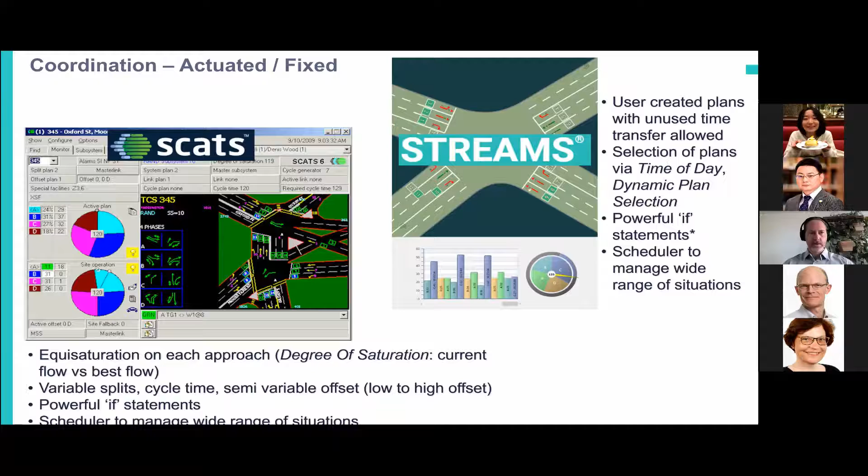The reason for that basically is it doesn't cost as much to re-optimize traffic signal phasing, because the majority of it's people's time. Whereas building a new road, that's going to cost a lot of money. However, you will never get the benefits that a new road will through the optimization process - the benefit to cost ratio is a lot more generous. So a lot of road authorities are finally coming around to that. I'd say we've been pretty advanced at that compared to some places around Australia, but we're getting more of a focus on optimization now, which is great.

The prioritization process for which routes should we spend our limited resources on varies from public concerns to systematic processes. Some organizations, road authorities, have a structured process with multi-criteria weighted analysis to rank all their corridors and go, these are our most important corridors, they perform the worst, let's go review them now. Whereas some organizations are still working on what I call the squeaky wheel problem, where whoever complains the most, that's where the resources are deployed to go look at that corridor.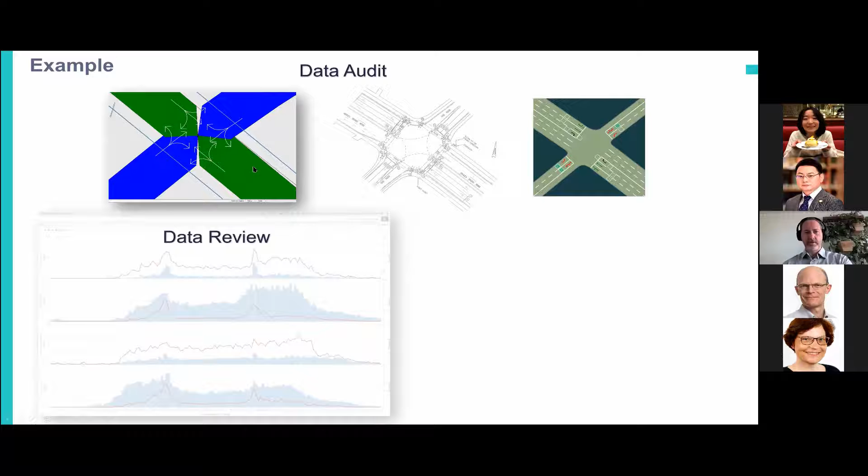We then do a data review where we're looking at the volume profiles and occupancy profiles through the various approaches and movements, and we're doing some checking to make sure the flow of vehicles leaving one intersection is arriving at the next intersection, or if there is a traffic sink or source between the two traffic signals, just making sure that the data matches up and it makes sense.

We're also looking for undercounting and overcounting. Whilst we do have a lot of algorithms out there watching the detectors to observe when they fail, there are also issues where double counting may occur that we've got to be aware of before we get too detailed.

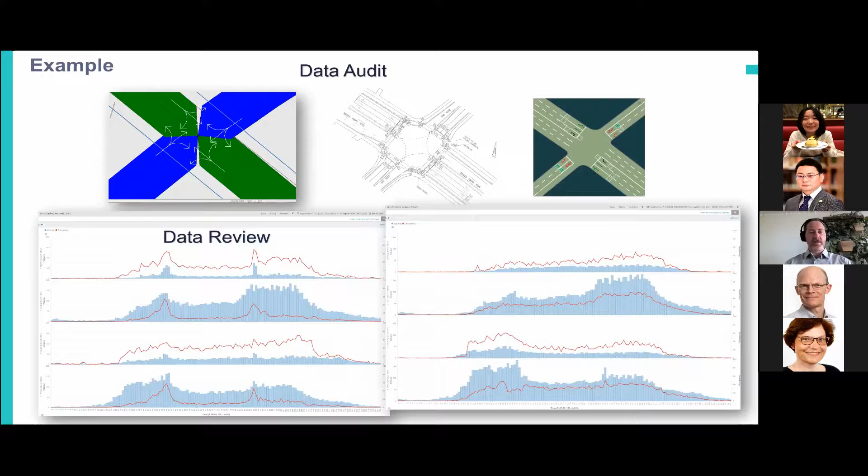We then look at our intersection groupings to make sure that we are coordinating the traffic signals we do want to coordinate, forming discrete groups of traffic signals - not strictly through all different traffic patterns, but the ones we do want to coordinate, where we have natural breaks. There's over 200,000 traffic signals in Japan, which blew me away. But because we still have gaps between our roadways, we have natural boundaries between our traffic signals, and we review the intersection grouping.

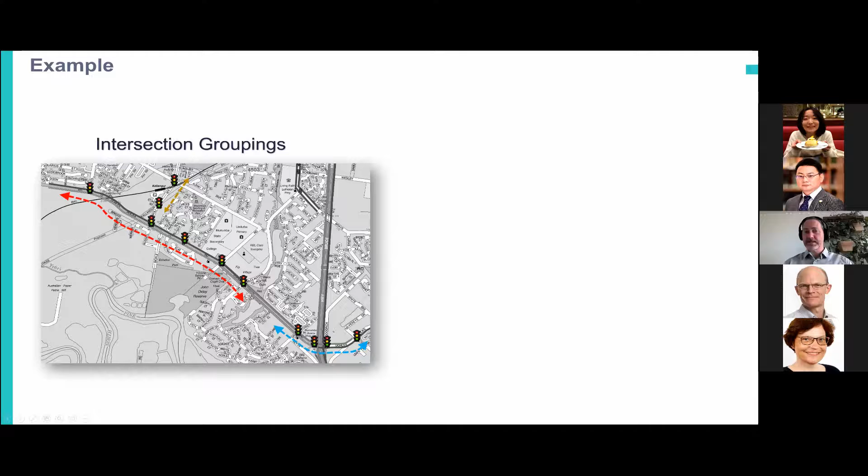We use cluster analysis, pumping a whole heap of data through a generic algorithm, looking at clusters to identify the traffic patterns. We're finding that very useful to identify the various traffic patterns throughout the day, so we know there's a morning peak, afternoon peak, school peak, whatever it may be for that particular grouping of intersections. We use that to help give us guidance.

A question's come up. I might jump to that at the end if that's okay, Maria. I will come back to that.

The cluster analysis, we use that to identify the various traffic patterns, so we know that when we're creating our new traffic signal timing plans, we're doing it for the right condition. If the traffic patterns generally stay the same from 10 a.m. to 2 p.m., and there isn't a lunchtime rush, then we know we don't have to go out every hour of that day - we can just look at it once for that whole traffic pattern period.

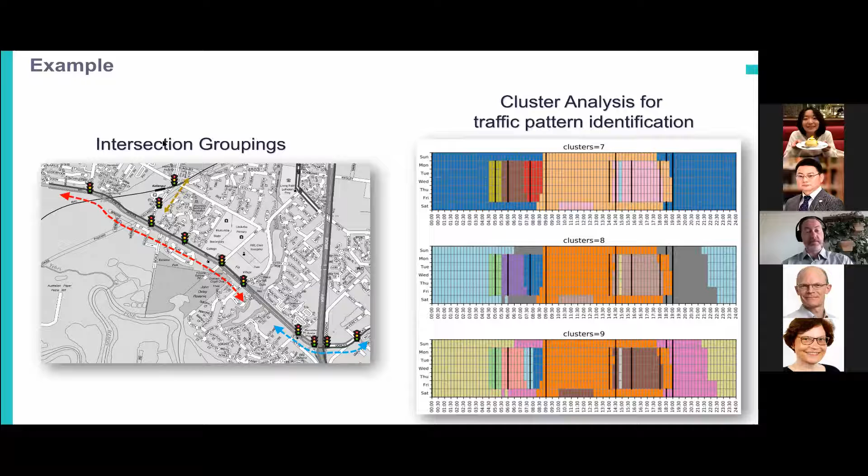Then the actual creation of the plan - we've got a lot of tools in both traffic signal systems. This one comes from Streams, a space-time diagram, where we're able to adjust the cycle lengths, adjust the phase splits we're allocating, remembering that some of the unused time can be rearranged, and we're also doing things like the phasing order. Down the bottom here, we do have a lot of phases.

Again, that's safety - we're very safety conscious. In Queensland, they're trying to ban all filter turns. There's a policy that filter turns are to be removed unless you can show why it shouldn't be, as opposed to the opposite, where they can be used unless you show why it's dangerous. So we're taking a very safety approach.

We have pedestrian protection inside Queensland. A filter turn is where the arrow drops off, so you're allowed to proceed across and do a right turn or left turn, depending on which side of the road you drive on. Driving on the left-hand side of the road, I can do a right-hand turn across oncoming traffic with the controlling green, red, yellow arrow dropping off to blank, so you can turn across when it's safe to do so.

So we play around with our phasing order as well and the offsets, to see if a leading right turn would be better than a lagging right turn. We also play around with the cycle lengths to see if we can get bidirectional progression, or if it is a northbound heavy plan - meaning we're giving priority to the northbound - then the plan will be created as such.

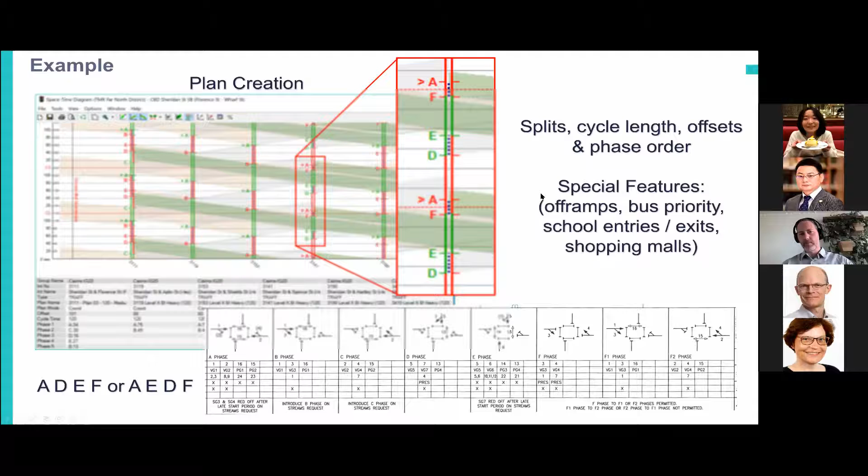If there's bus priority along the corridor, school entries and exits, where we have for a very short period a lot of traffic around schools, because in Australia everyone drives their kids to school. The days of walking to school are long gone, it feels like. But that's when schools are open, and shopping malls and things like that. So we've got to take into account all those various aspects when creating our plans.

And then towards the end of it, we test and adjust on site. So we'll drive the corridor, we'll go out and drive it. We'll be on our laptops observing the data inside it, and we'll also be watching it through our CCTV systems, reviewing the operations of the corridor back at the office. Preferably, we will go out driving it to make sure that it's operating as we intended.

We're also looking at the benefits of it. So we use Bluetooth readers quite a lot throughout Australia now to measure travel time between two points, and that's processed by a system called Addinsight across pretty much most of Australia now. And from that, we'll also create reports to show the benefit to the community.

The idea being that delay equals a loss of gross domestic product. So the way we see it, there's a program out there called Sidra, a modelling package, and in it, it values roughly around 32 Aussie dollars for one person's one hour of delay. So using that as a sort of goalpost or measuring stick, we calculate the travel time savings and the delay savings through doing the optimization process. And it works pretty well - it helps continue the funding for the important work of optimizing the network.

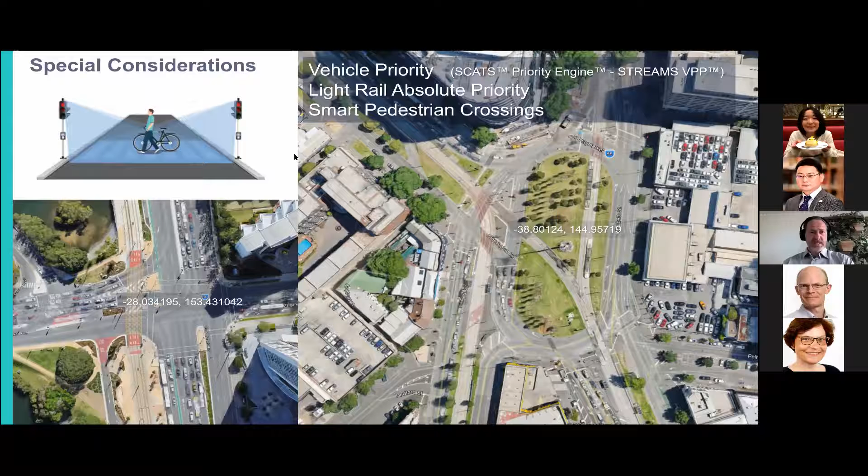There's a lot of off-ramp traffic coming from there to go to the urban environment around it. We have the general background traffic coming through from the suburbs and alike, and all that has to compete whilst trying to maintain the general background traffic of an afternoon peak, which occurs whilst there's an event and a whole lot of extra traffic wants to get to the event happening at Movie World.

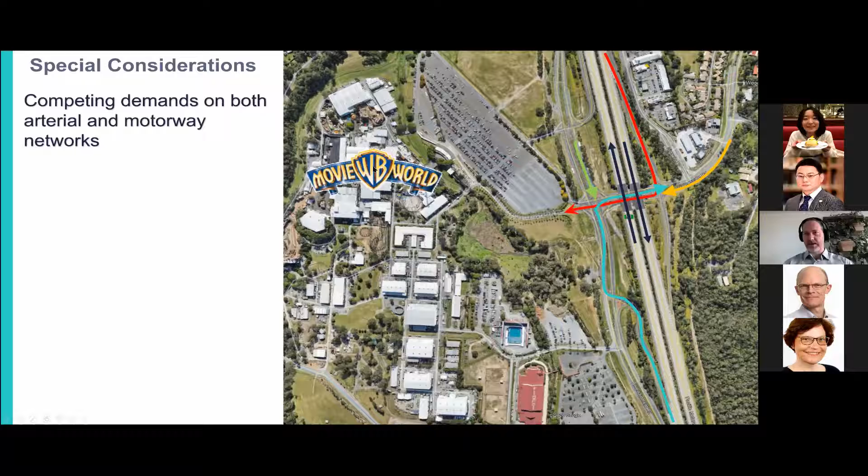So we use something called decision trees to manage those complex situations, using the decision trees to look at all the variable inputs, and if particular conditions are met, do this option, if these other conditions are met, do this option and alike. We can manage very complicated situations of competing demands using the tools available to us.

So that was just final comments from myself, if I may. To me, in my perspective, more focus is needed on signal optimization. The number of people who optimize traffic signals across Australia is very limited, in my opinion. I'm not trying to criticize the road authorities, but I do think we need to spend more time optimizing the traffic signals, because I think it would give a very large community benefit.

I think into our traffic signal systems, greater network awareness is needed. It's fantastic that we get detector information and stuff like that. But there's stuff like vehicle to infrastructure, getting more of that information, Bluetooth travel time, Google travel time, whatever inputs we can get into our system so that we can make better informed decisions.

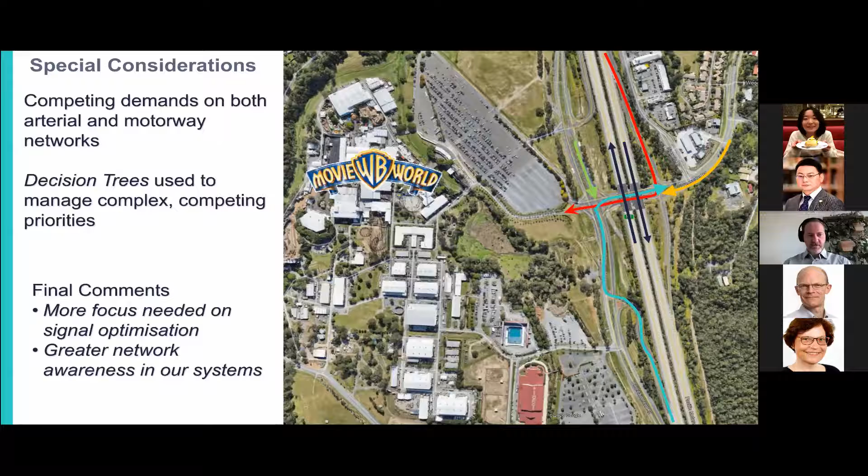One of the things stopping us in an Australian context is the traffic signal controller, and the limited inputs that can come through it. But through ITS platforms, we can get around that and do more with it. Plus, I'd love to see an API style control for the traffic signals so that we can have other people developing algorithms and not just relying on a few companies to do it. So that's my 2 cents. Thank you.

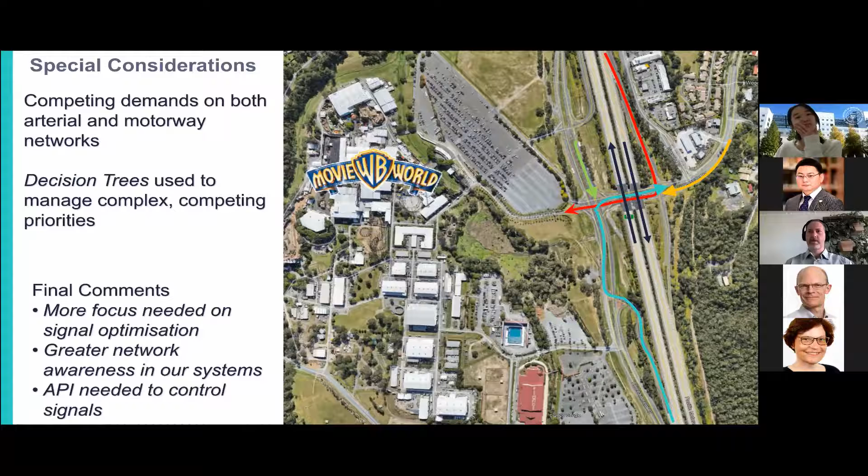Thank you for your presentation, Daniel. So we have a question in the chat, first from Maria. So, Maria, can you? I thought I was going to ask this question after, but I clicked on my return button, making you go out of your concentration while I answered my question. You're more than fine, yeah.

Yes, we definitely do have a lot of dashboards. We've got a lot of information available to us through STREAMS and SCATS, and there's a hell of a lot of information, almost too much information. Trying to turn that information into intelligence is the trick. But no, we can see exactly what's happening on street through the systems: real-time detection, signal groups, pedestrian crossings, everything.

My background as a traffic engineer working for road authorities, I prefer to get out in the car and drive it, because there's a lot more that I'll see from the roadway that I won't see even from camera or the systems. One of the limitations for the traffic systems we've got in Australia is we don't know how big the queue length is. We can have 500, 800, 900 meters between our traffic signals. We've got detectors located near the intersection, or 35 meters from the stop bar, or in SCATS land, 4.5 meters back from the stop bar. But I don't know if the queue is 500 meters or 5,000 meters, and that's one of the limitations that we have.

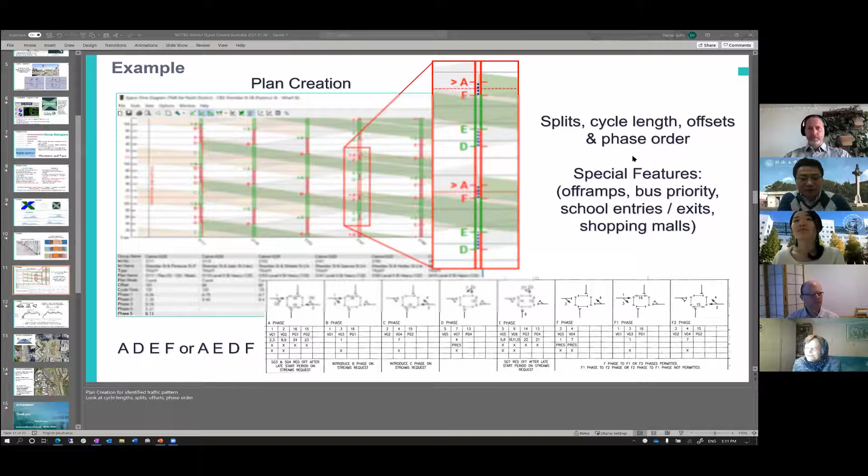So do you have this kind of position or task for every city, or is it customized for different cities? In Australia, because each state does things a little bit differently, we're working towards operating the same, but we are individual beasts. Over in Western Australia, they've got this concept of the route manager.

It's something that's been brought in by the manager there, the executive director for the road operations group. It was his idea - Tony Earl is the gentleman's name. He used to work for Transport for London, so I'm sure he brought the idea from there. The idea is that this person or position for this particular area is responsible for that route.

Everything and anything to do along that route, they're meant to be across and understand. There's a saying that when you're a hammer, everything looks like a nail. So when you're a traffic signal engineer, all you try to do to fix the corridor is readjust the timings and play with the traffic signals.

But in reality, it may be 200 meters away from the traffic signals where there's a problem you should really look at. Or downstream, when traffic leaves, there's a roundabout causing all the problems along the corridor. The idea of the route manager was to stop being myopic about traffic signals and look across the broader traffic engineering discipline to solve the corridor.

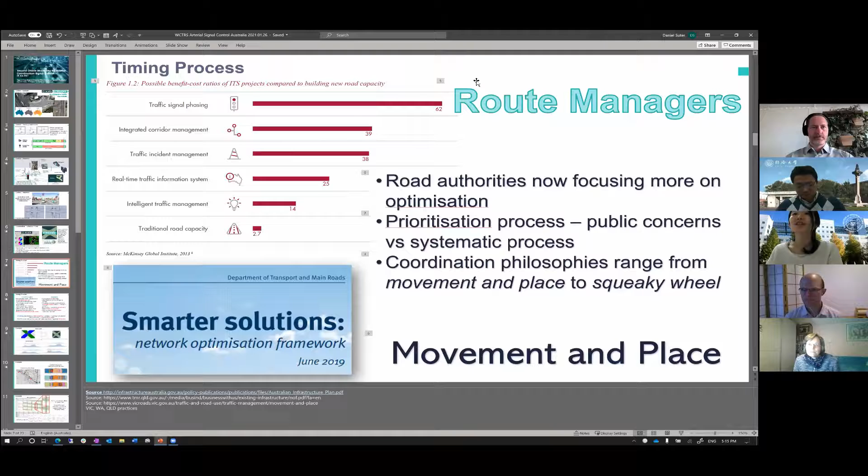So let's move to the discussion as a whole workshop. Today we have 3 presentations from Japan, Netherlands, and Australia. In the previous workshop, we had cases from China, the USA, Germany, and Switzerland. So we can start from any point regarding the discussion of what is most important for signal coordination, or what are the challenges, or something like that.

I have a common question for all three speakers, which was asked to Maria before. Do you have a standard procedure to determine when and where to implement signal coordination? If it's decided that a corridor should be coordinated, what type of coordination should be used? Is it recommended in guidelines, or decided by different consulting companies or road authorities? This applies to Japan, Australia, and the Netherlands. Can you understand the question?